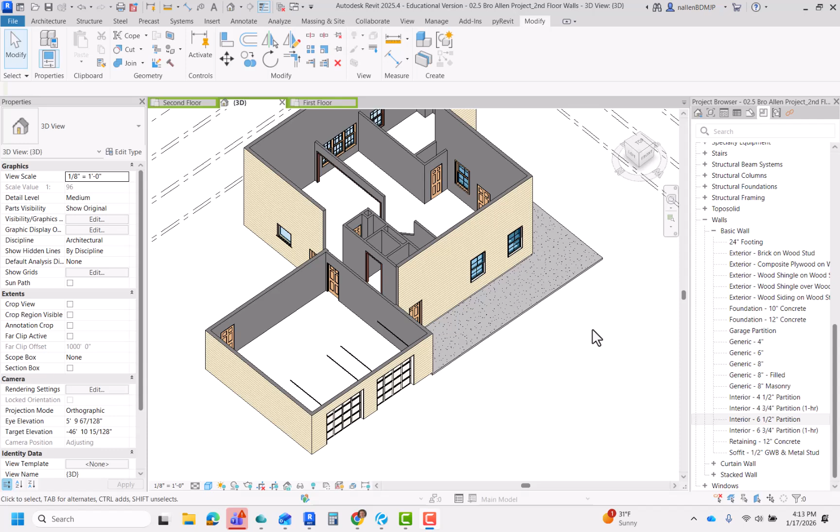In this video, I'm going to show you how to make a wall that you can place in between your house and your garage. Now, if we inspect this wall, what I've got here already is just a regular interior partition wall, 4.5 inches thick. It's got gypsum board on both sides, and it's got a 2x4 stud inside. And in fact, that's where we're getting the name here. It's the thickness that you would have if you added a 2x4 plus 1/2 inch sheetrock or gypsum board on both sides. The total thickness would be 4.5 inches.

Now, that's great for all of these interior walls. Place the same thing throughout. It's not great, however, between the house, this is my house and this is my garage, because we need more insulation, more than we can fit in a 2x4 stud cavity. You can see that my other exterior walls, they are thicker. They're thick enough for that insulation, but they also have siding, and so I can't use those walls.

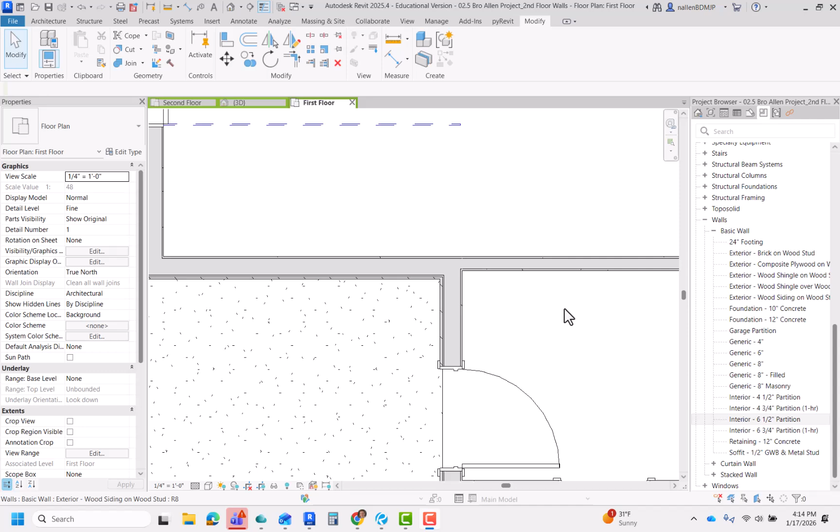Instead, what I need to do is create a brand new wall type, one that doesn't exist yet, that I can place right here between the house and the garage and maybe a few other places. If I select this and I hit the drop down, you'll find that there actually is a wall called a 6.5 inch partition, which is honestly mostly what I'm looking for. The problem with this one is that when you see this little enlarged image, it's showing everything white in between the gypsum board, which means it must have a metal stud. When you hover over this one, it's brown, so it's a wood stud, which is why I started with this one. So what you can do in your own project, first place a 2x4 in between house and garage, select the wall, and then we're just going to modify this one.

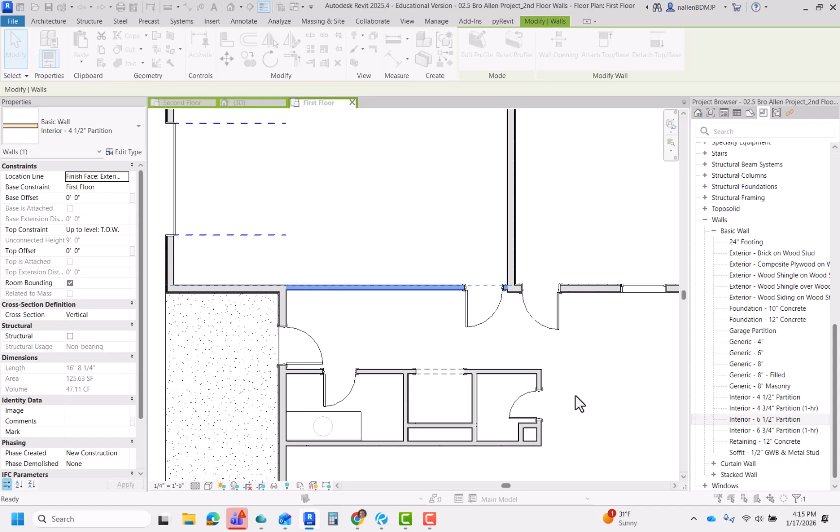So I'm going to click Edit Type, and before I start making changes, I got to recognize that if I were to change this right now, it would change the wall selected, but it would also change every other wall that's using the same wall type. In my case, every interior wall would become too thick. So instead, we're going to duplicate this. And once we give it a new name, only the wall that's selected is going to receive the changes. So we want to call this a 6.5 inch partition. Now, unfortunately, I can't call it just that because there's already a wall called 6.5 inch partition. So I think I'm just going to call this one garage. 6.5 inch or garage partition, I guess, would make more sense, wouldn't it? However you name it, it will be fine.

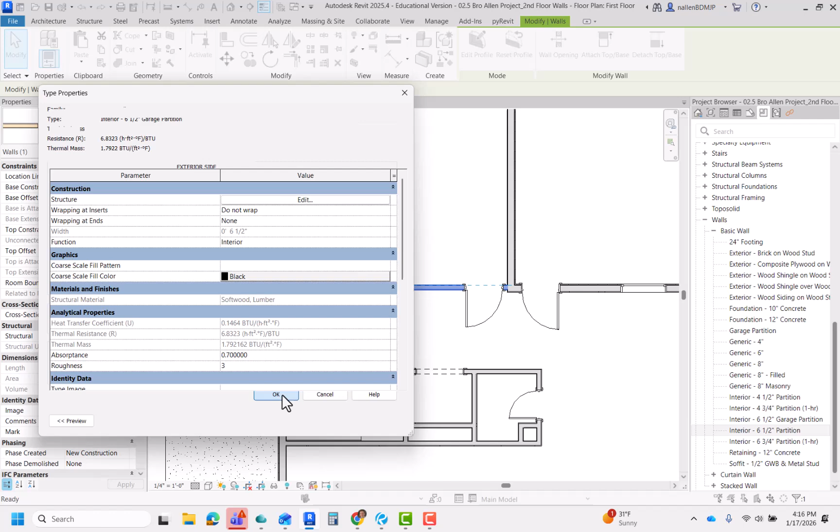Okay, and then we're going to go in and we're going to edit it. It shows that the structural portion, the lumber inside, is 3.5 inches thick, indicating there's a 2x4 there. We're just going to update that so it becomes a 2x6, which is 5.5 inches thick. When I click OK, that wall gets thicker, and I didn't affect any other walls. Now I do want to point out, even though it's called garage, that was because I had to give it some kind of unique name. I'm going to use it in one other place.

If you've got plumbing and you want a 2x6 wall, it's not required, but if you want it to be 2x6 because you know that the plumbers are gonna love you for it, because it's hard to put all the pipes that they need for plumbing inside of a thin wall like this, I'm going to update this one to also be 2x6. And I'm going to do it first by separating the left from the right, because over here I don't have plumbing. That doesn't need to be 2x6. Right here I'm anticipating a toilet will be there. So I've got the sink plus the toilet. This whole wall will make 2x6.

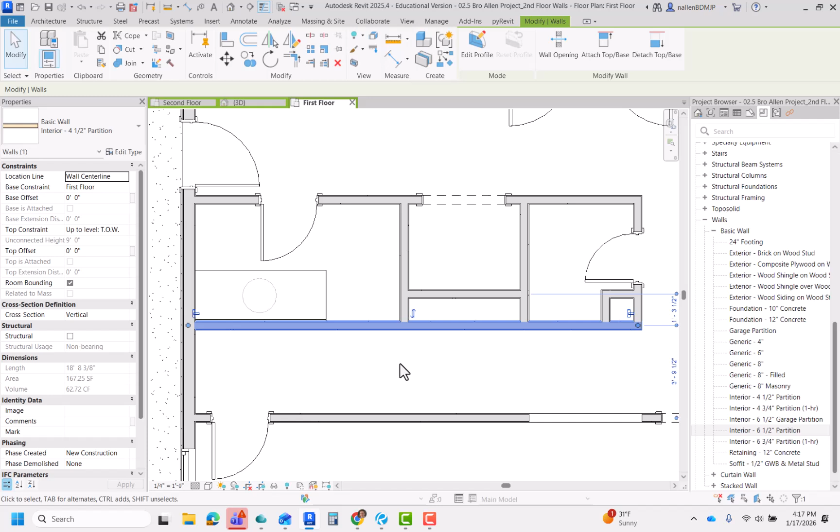I'm going to do SL for slice. And if you don't know the shortcut, this is the tool, split element. Or I call it slice, but really split element's the name. Hover over wherever you want to slice it. Then hit escape, select the wall you want to change, go find, in this case, a pretty bad name for a wall that is not connected to the garage in any way, but that's okay. I actually had to push my arrow key to move this so that it would align with the wall to the right of it. The reason why it's okay that it has the wrong name is that's just for me to identify what the wall is, right? Nobody else sees the name. I can just see that it's a 6.5 inch partition wall, so that'll work.

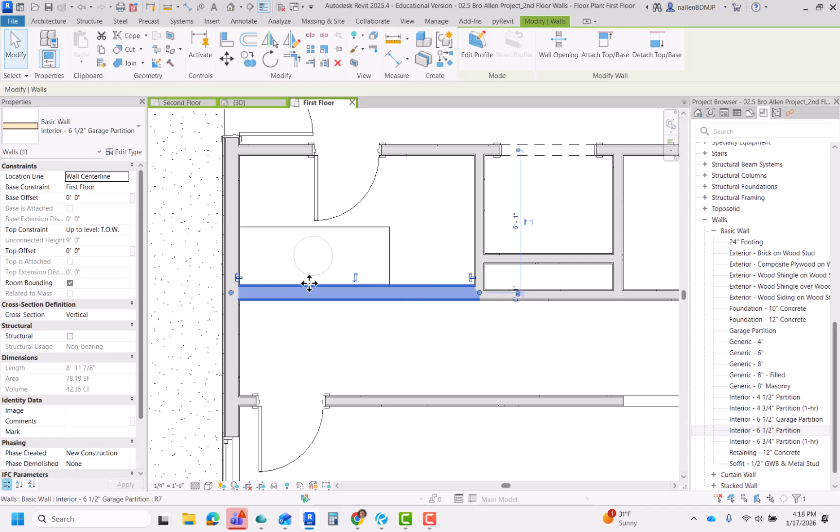Okay, let's check it out in 3D. And there's my thick wall for plumbing. There's my thick wall between house and garage, and we're done.